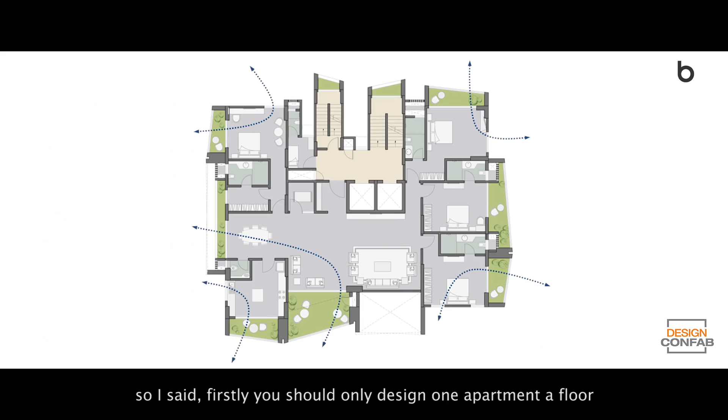So I said, firstly, you should design only one apartment a floor. And we had a very small plot, so in any case you couldn't design something very lavish. What we managed to fit in is a 3-bedroom, decent size apartment, 2000 square feet. And each room of each of these apartments opens out into a balcony space which is 2 floors high. Your neighbor on top of you cannot look down into your balconies, and he or she has their own balconies which are again 2 floors high.

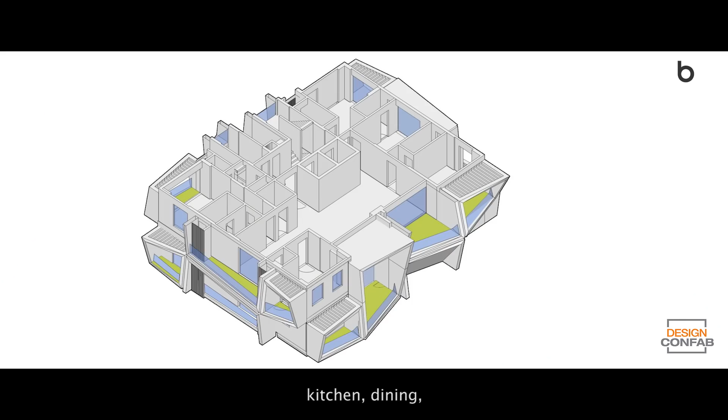So it's not about every apartment opening into a balcony, it's about every room of every apartment, including the kitchens. Kitchen, dining, all 3 bedrooms and living room open into 24 feet high spaces, which are extensions of your indoor space. The whole idea was trying to recreate a bungalow in the sky. One of the most important things is, when you are in a bungalow, you enter the gate, it's yours. You enter the door, it's yours. You don't share a lobby with somebody.

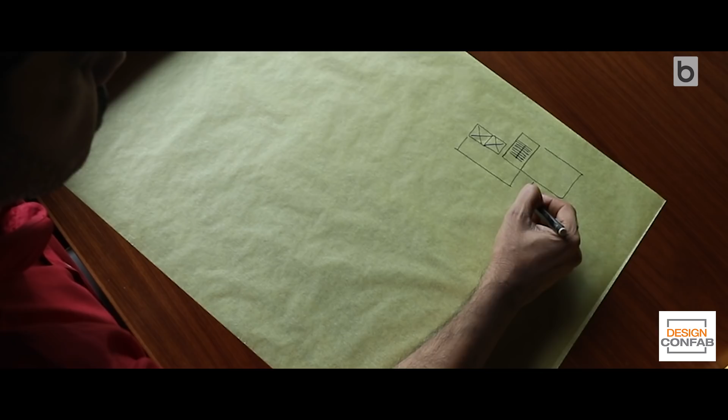So the whole basic premise of this flat is that a person walks in from this entrance lobby. That's the entrance lobby. And you have a bedroom here. This whole thing is the living dining. So this is the basic plan. Person walks in, this entire space is the living room. And if you look inside, there is literally zero passage space.

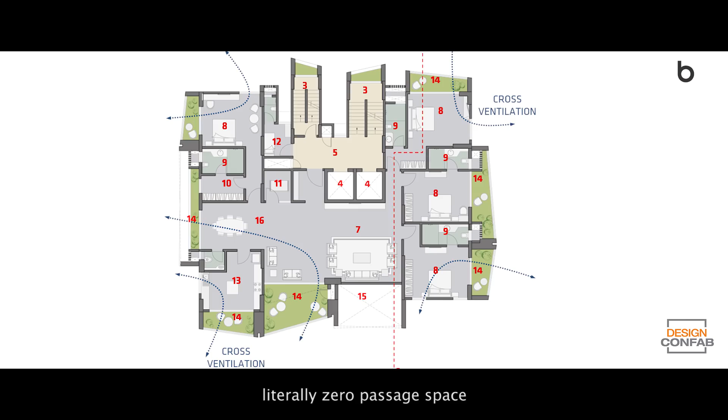So you have a bedroom here, a bedroom here, a bedroom here. All 3 corners are bedrooms, 1 corner is the kitchen. This living room opens up into alternate balconies on each floor, and each of these balconies is angular. And each one of these rooms also opens into an angular balcony, including the kitchen.

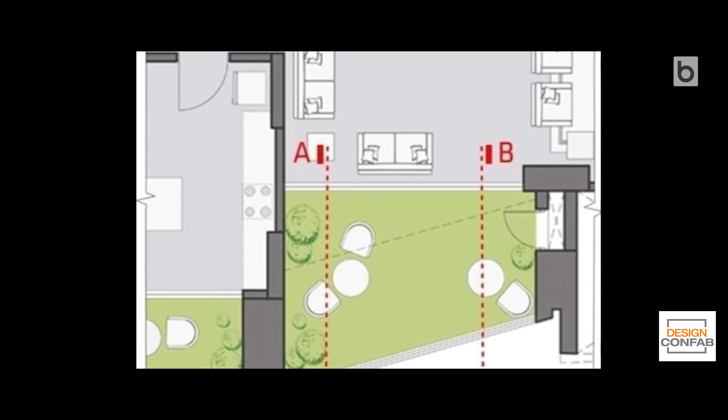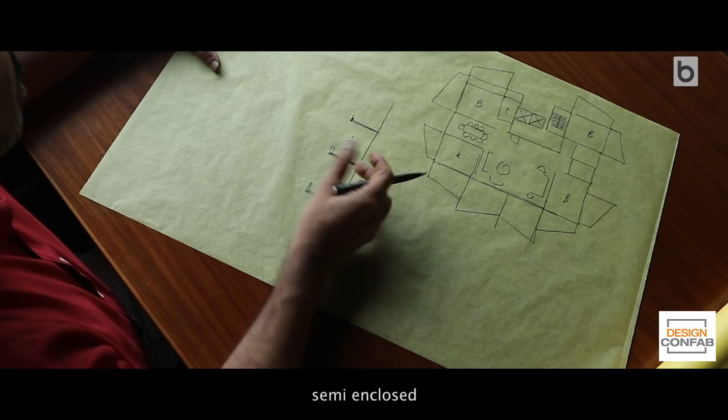Ordinarily, what will happen, let's say in cross section, these are 2 different floors. If you make a balcony in a Bombay or a Delhi building, this is the person standing here, the person standing above. Every balcony is identical. So a balcony is completely sheltered and it always feels semi-enclosed, as opposed to the room behind it which feels fully enclosed, as opposed to the space outside which is fully open. So it's enclosed, semi-open and fully open.

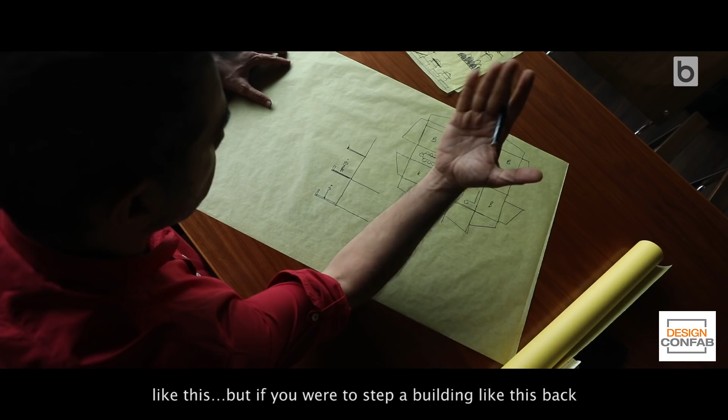Now we want to create that open space of a terrace within a balcony. How do you do that? You have a small plot. One way to do it is you step the entire building back like this. But if we were to step a building like this back, this building would have gone out of its plot. So there was no way of giving a terrace in the conventional way. So we came up with this idea that we'll twist these balcony spaces.

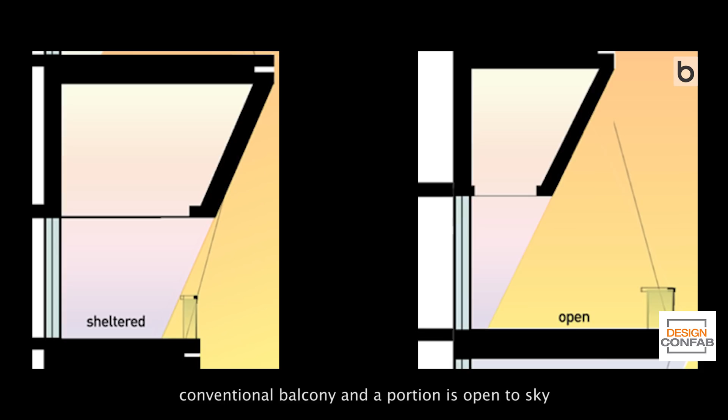Now an enlarged portion of this balcony in plan, that is the floor, and this is the roof of this balcony. So which means that a portion of this is sheltered like a conventional balcony and a portion of it is open to sky like a terrace. So you are now giving that choice to any individual who's walking out of their room to stand outside here in this sheltered space or to stand outside here in this open to sky space. So 1/3 of this balcony is like an open to sky terrace and 2/3 of it is sheltered.

So this choice is given to every single person in every single room of every single apartment in this, and this is what makes it different and makes it unique. Now what this does in terms of the elevation of the building is that it gives us its unique characteristic like this. So the building also gets this whole organic kind of feel and very sculpted kind of look, and at the same time what you're doing is you're giving these open spaces to every single room. So that's what makes this building unique.

So while we've done a reasonably large number of residential projects of all kinds in different cities, we find that developers in India are not open to doing something unique, to doing something different. So starting from the brief where we actually created the brief for the plot to the final outcome, and in doing so we did it in a unique way which allowed people to perceive those spaces in a different way. So a number of factors that make this very interesting. One is that you got your way with the brief.

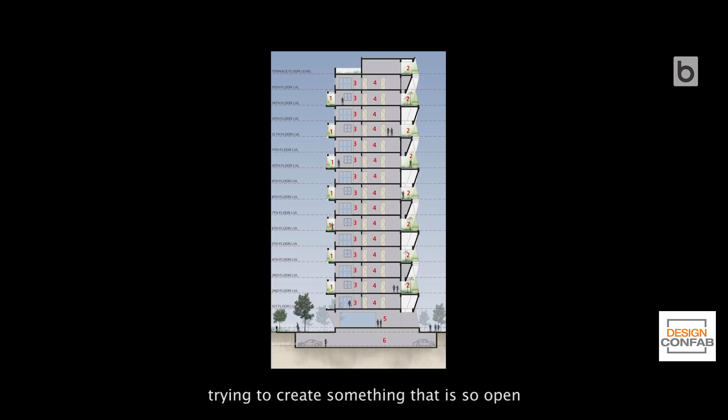The second is that you got your way with trying to create something that is so open, because that's what a house should feel like. It should feel open. You should not feel that you're closed into a box, which is what 99% of the buildings do. So the client in that sense gave us this free hand, and we were able to achieve something that is completely unique and completely different to experience. And the most sincere appreciation came from the people who moved into this apartment, saying that they have never experienced an apartment like this. This building won the leading European Architects Forum award for the best residential building of the year worldwide in London, beating several buildings from across the world in different places.

And this is a project in Ranchi which is done at 1800 rupees a square foot. In fact, the only constraint we had on this project was the client said, well, please don't make me spend more than this X amount, and it was done within that much. Because if one was to spend more than that, the project would not have been feasible in a small city like Ranchi. So we've actually used a contractor from the city, and again, a huge credit to that contractor as well. And it took 4 years to come up because it was a slow process, but the end result is that it came out exactly the way it was supposed to come and actually went beyond what we thought would happen.